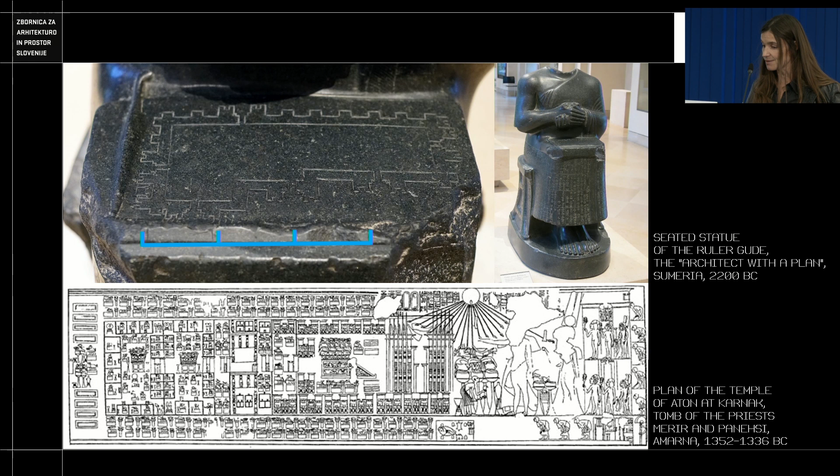These two drawings remind us that the fact that the floor plan is a cross-section of an object with a horizontal plane was once something yet to be discovered. On the first drawing, we can see rudiments of a floor plan drawn even to scale, whereas on the second drawing, we can only see some parts drawn in floor plan and some parts drawn in frontal view, like a child would do.

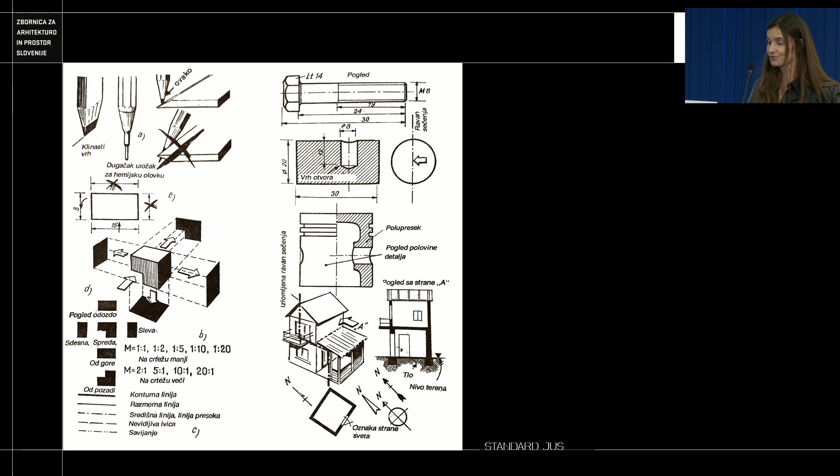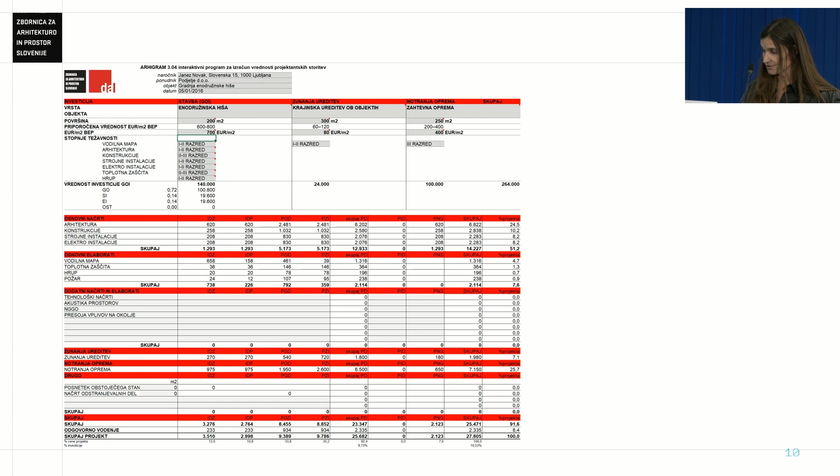That means the rules for drawing plans must be defined, and these are the last drawing instructions we had in Slovenia. They were part of the old Yugoslavian standard, the JUS standard, as maybe some of you remember. As for the evaluation of services, a few years ago we only had this very simple calculator based on investment value.

I should also add that in Slovenia, the legislation is constantly changing. Here is the list of the changes in recent years. As you can see, it changes almost every 2 years, and these are not minor changes, but quite major. In the last 4 years, we had 2 big changes of the Building Act. That means, of course, that all the bylaws are changing and so on.

In addition, the latest version of the Building Act defines only what is needed for building permit application and some basic contents of the detailed design or construction phase plan. Everything else was left to interpretation.

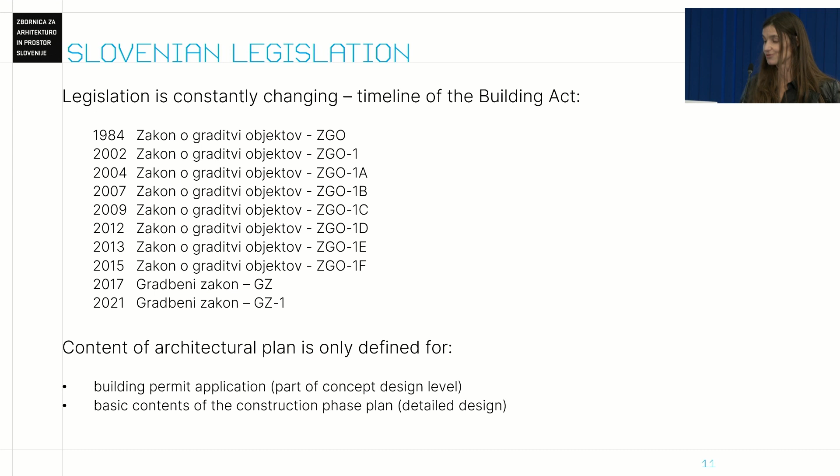For all these reasons, the Chamber of Architects of Slovenia decided to prepare the standard of the Slovenian Chamber for Architecture and Spatial Planning. This is not part of our national standard, it's a standard made by our chamber. Today it consists of 6 volumes that cover all the 4 points I spoke about before. They are written for architecture and for landscape architecture.

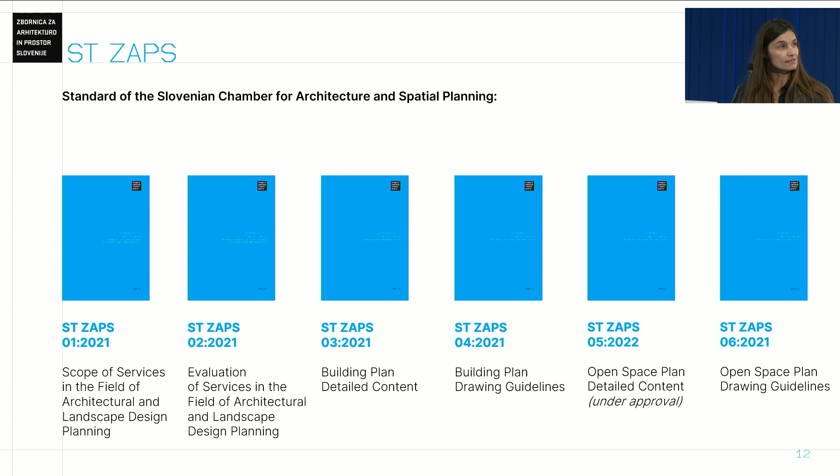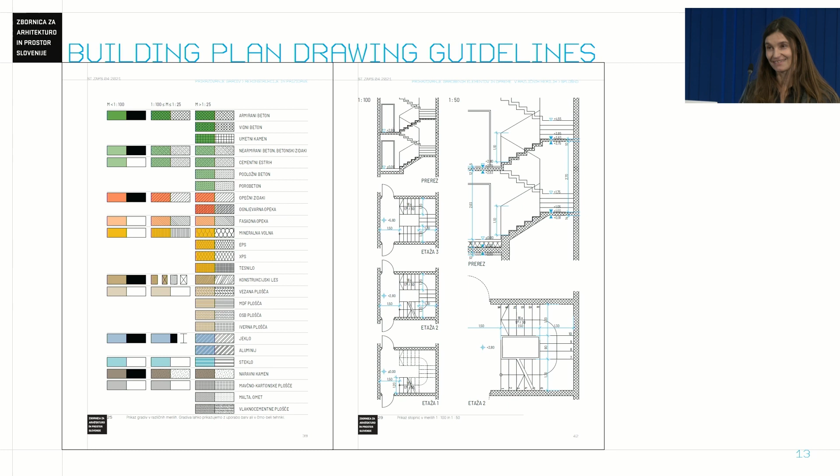The drawing guidelines show us how to draw different architectural elements, like stairs, windows, doors, etc. I'm sure a lot of other countries had that before; for us, it was something new. And the same goes for open space design elements.

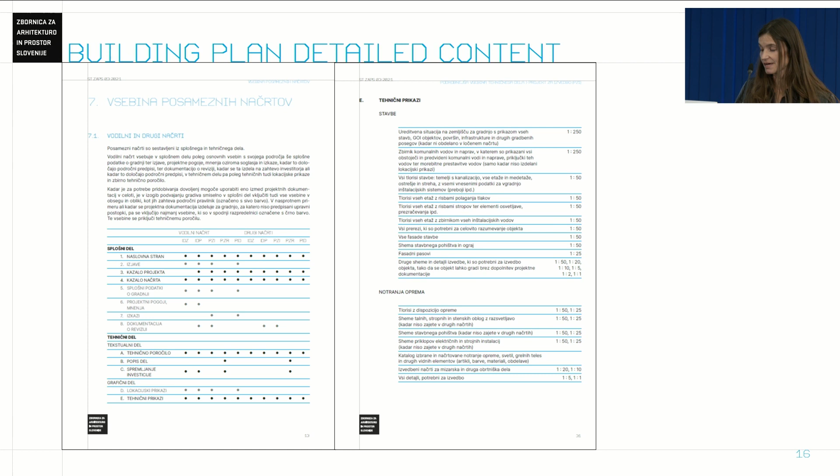Then we have building plan detailed content, which deals with detailed descriptions of architectural plans, such as which drawings had to be drawn and in which scale and so on. And the same for landscape architecture.

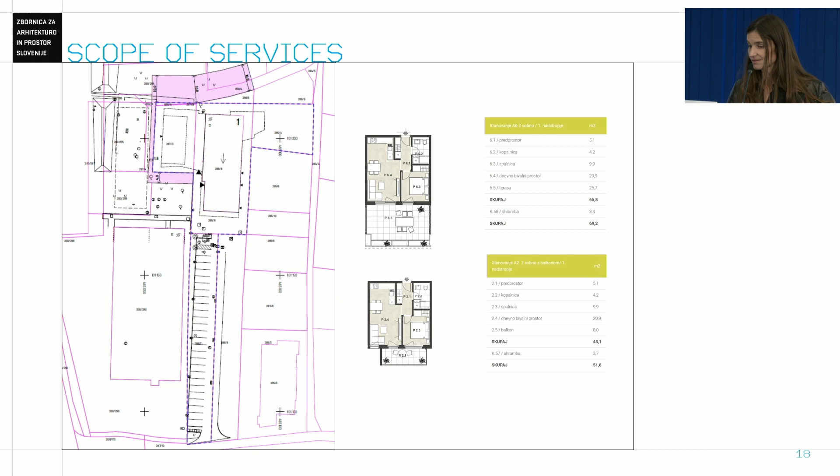But since drawing plans is not the only service in the field of architecture, an elaborate scope of all services is needed to address other tasks, such as preparing a sketch for agreement on temporary easement, as the one in the picture, or preparing commercial drawings, etc.

Therefore, the standard with scope of services was created that covers the whole life cycle of a built asset. To do this, we had to find a basis with defined stages or phases in the life cycle. We were considering several options.

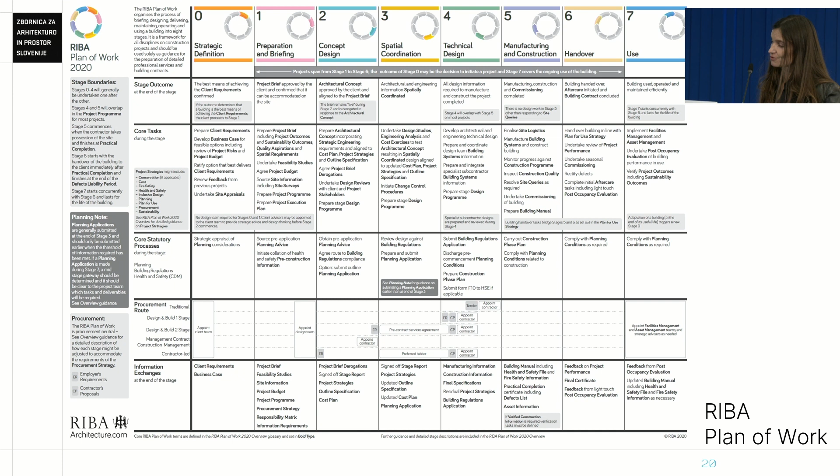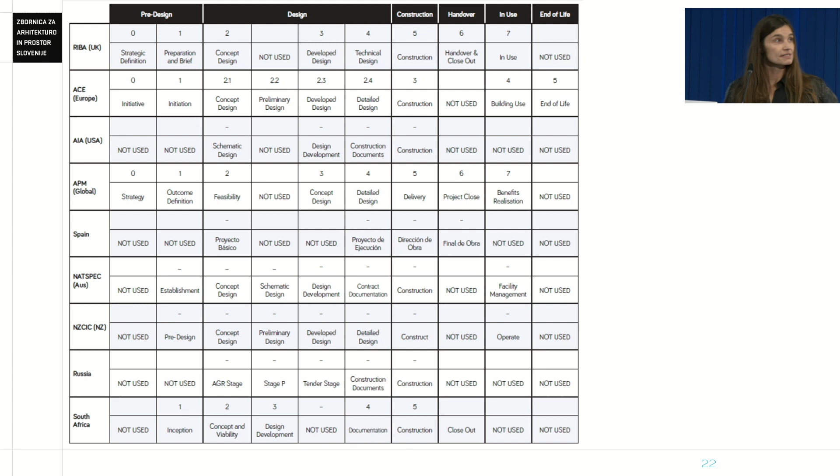The first was the ISO standard, the international standard, which is the only one used more or less throughout the European community. The second was the plan of work of the Royal Institute of British Architects. And the third was the scope of services, a draft made by the Architects' Council of Europe. In this comparison table, you can see there are not so many differences among them.

Finally, we followed the international ISO standard because it is most comprehensive and covers all the phases. For defining the detailed descriptions of services, we followed the logic of the German tariff regulation, the HOAI, adapting the idea of basic services and special services.

So this is the result: the scope of services for each stage and substage in the lifespan of assets, divided into basic and special services.

The last volume of our standard deals with the evaluation of services. We determined the rules for evaluating services and developed a calculation application we call Arhigram, which looks pretty much the same as the food menu I showed before, because you can check simply by clicking the boxes of what you're ordering and what you're not.

Prior to Arhigram version 4, which I showed before, we had a very basic method of calculation. But in version 4, we developed a more elaborated way of calculating fees based on construction costs, facility type, and complexity of the task, and based on this data, the fee in euros was calculated. So that was the first version that we had.

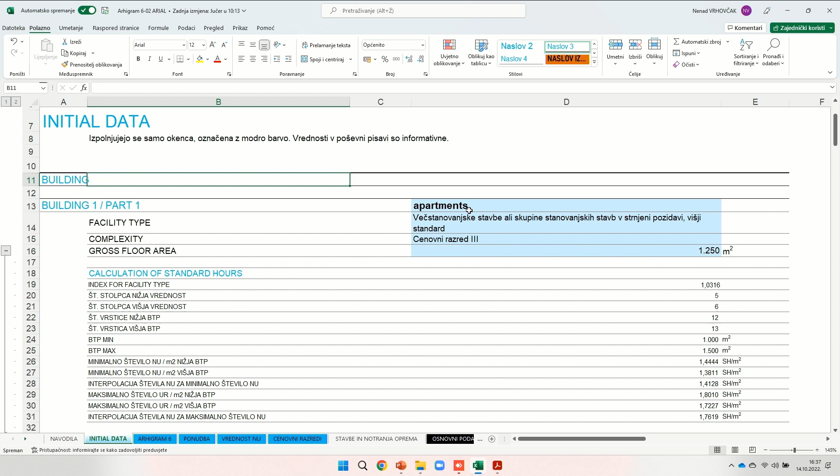Now I'd like to briefly show you how it looks. It is divided into several parts, which means that if you have a more complex building, you can put in data for each part separately. For example, here for apartments, it has several parts so that you can describe more precisely all the data about the building, and you can put in different complexity and different facility type for different parts.

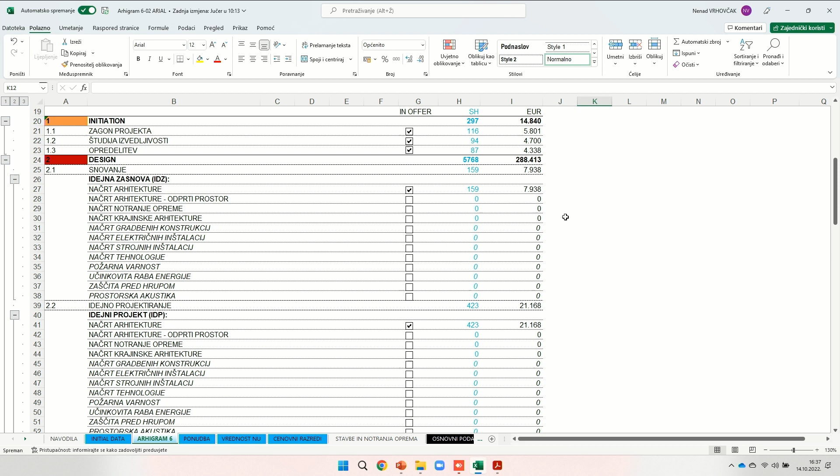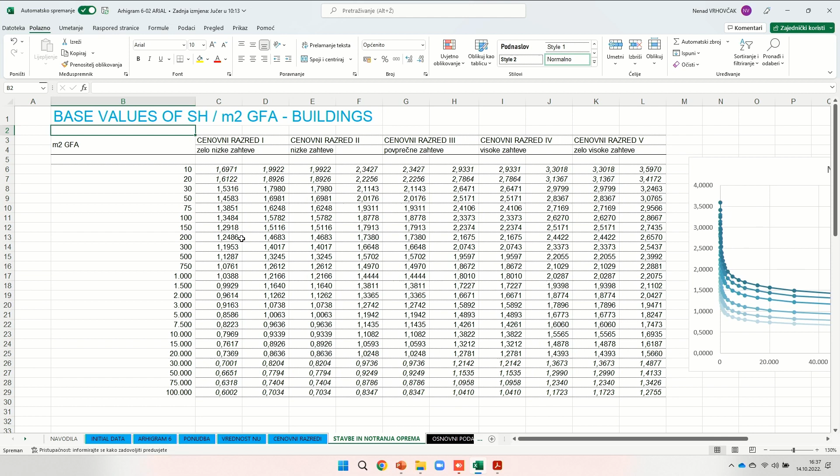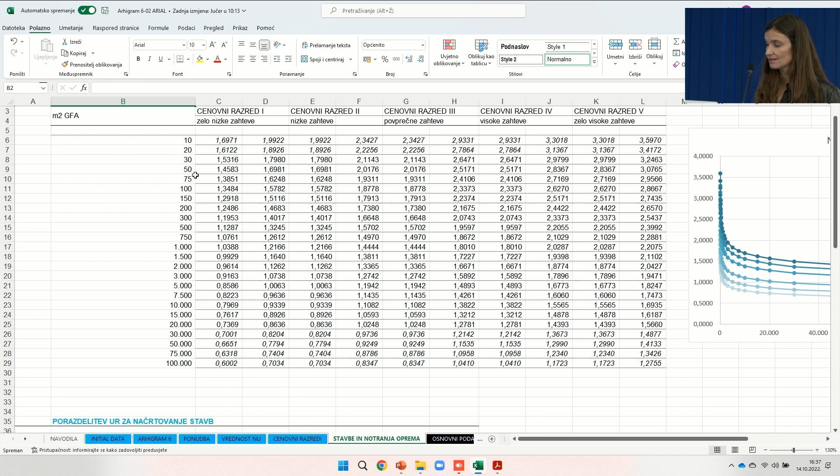Based on the input, you get the number of standard hours, and the background of it looks similar to the HOAI, only that we have a number of hours per square meter of gross area instead of euros like it was before. So there you can see that the number of hours is decreasing with the size of the building and increasing with the complexity of the project.

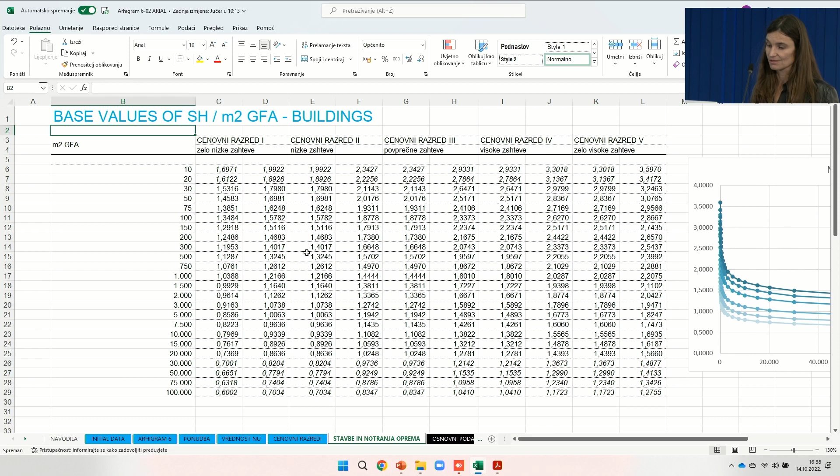I think the numbers that are given here are arguable, a matter of discussion, but the system is, we think, the right one.

For the achievements we had in Slovenia, we managed to do it so that Arhigram 5, the previous version—because the one I showed you is still in development, it still needs testing and so on—the previous version is used to calculate fees for projects resulting from public architectural competitions, which for us is very, very good, and we are quite proud of it. We are keeping regular courses about the use of the standard for members of the chamber, and also we use it for professional supervision, which the chamber has to do among the members.

So for conclusion, the establishment of a standard of the rules of the profession is essential for enabling comparable services, obtaining comparable offers, preventing dumping, encouraging employment in architectural offices, which is a huge problem in Slovenia, and also improving the social and material position of architects, not to mention improving the quality of the work that we do.